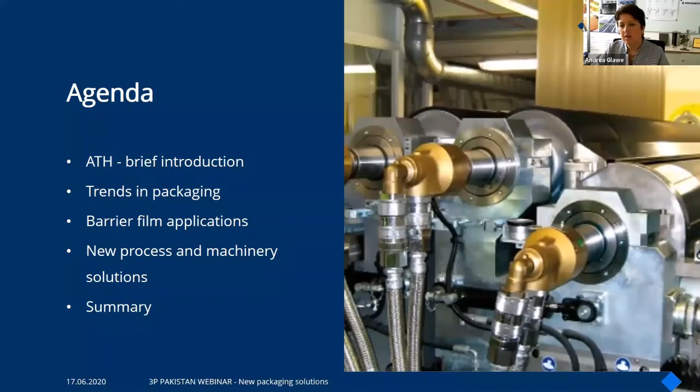The title which I chose was Newest Developments in Coating and Lamination for Specialty Films and Flexible Packaging, because this is really one trend where we as Kroenert are seeing a lot of challenges and opportunities right now. I want to give you a very brief introduction into our company. Then I will follow with all the trends which we see in packaging. I will show you some ideas for barrier film applications, some machinery design ideas, and at the end I will give you a very short summary.

So you see here our company view from the roof side. We are located in Hamburg in the city center, really in the living area, or in the most active area of Hamburg and the north of Germany. Kroenert itself, we belong to a holding group of companies. So we have Kroenert, which is the most important part because we have the highest number of employees. We were founded in 1903, and with that we are one of the oldest machinery suppliers in the world. So we have a very long tradition, very interesting to follow all these historical activities from the beginning until today, through all the critical times of Germany.

We founded our own drying company in 1995. So whenever you get a company line from Kroenert, the equipment for drying is coming from Drytec. Two years ago, we bought the company Coatema, a very efficient company for small lab equipment, for very functional equipment, and also sheet-to-sheet coating equipment. And we have our own gearbox company, which is doing parts and equipment for us.

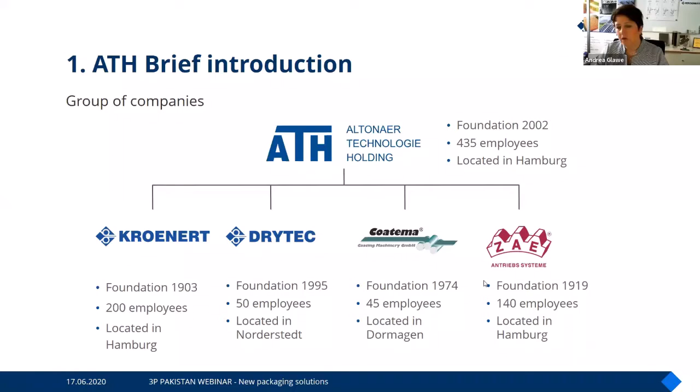So what are we doing? We are producing complete coating lines, as you see at the left-hand side. We are doing also single equipment. So if you have an existing line and you want to retrofit the machine with some more sophisticated equipment, then we can help you as well. We have all the drying equipment, which you see here at the right side, and we are also doing all the winding equipment. So overall, what Kroenert is doing in the coating business, we realize here in Hamburg.

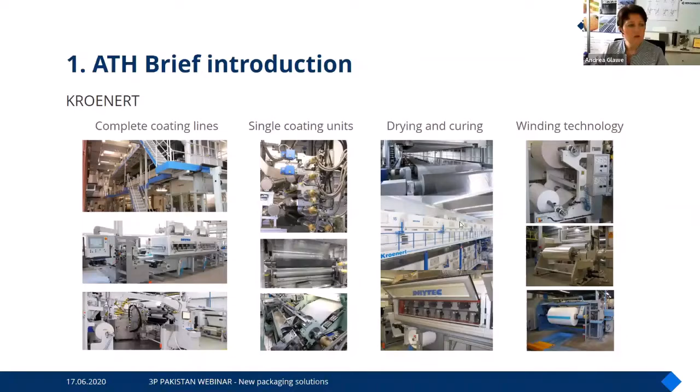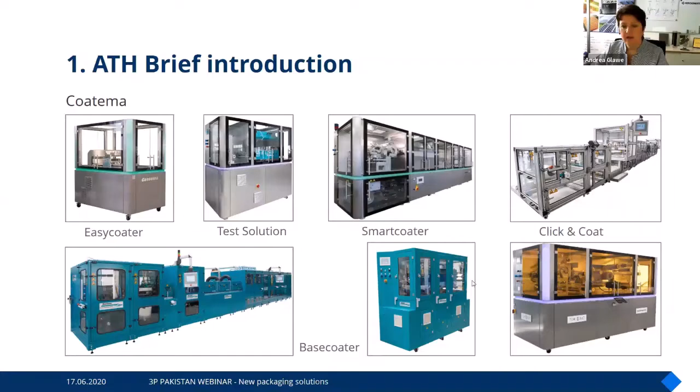Some ideas of what Coatema is doing: we have a lot of different equipment, and as you see, size and functionality can be highly adapted to the end product. So from small sheet-to-sheet coating over small lab lines, 10 millimeters up to 500 millimeters width. Whenever you go into test equipment, they are the best partner for you.

In which areas do we handle our machines? You see here at least three product areas. We are doing a lot in flexible packaging, so whenever you have a flexible packed product in your hand, it could be a product from our machines, from any kind of materials. In the middle you see technical products; even here we have high dominance in the market, from flexible films to protect materials, like glass protection film. Here you see in the left-hand picture some ideas about test equipment, but also about reflective material - very versatile.

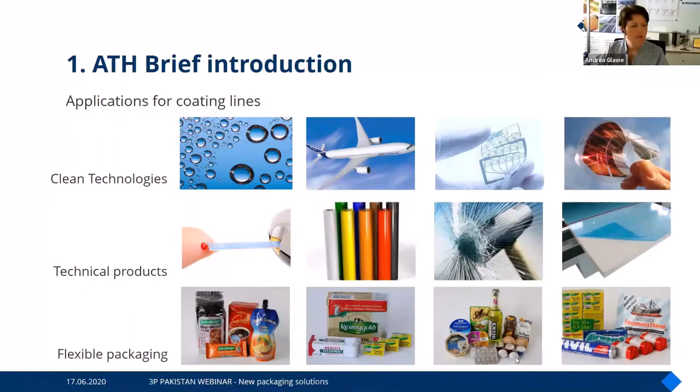And last but not least, we are doing a lot of equipment for clean technologies. We are certified supplier for the aerospace industry, so Airbus, Boeing. Whenever you are sitting in a new carbon fiber airplane, it's at least a little bit realized with our equipment. We are present in printed electronic and also in organic photovoltaic. So you see the range of products which you can do by coating and laminating is very wide, and this makes our business very interesting, honestly.

So what are the trends in packaging? I guess you all know that we have huge problems worldwide with waste material. There are always pictures of views of the ocean which is polluted with plastic. And at the other side, you see some ideas of numbers. For instance, on the left side, it's quite interesting when you see how many plastic bags are used and what is the volume of them. And then only 12 minutes such a plastic bag is in use. You can imagine it would be good to have recycling concepts to keep these bags out of the environment, out of the wasting in somewhere which is not recyclable.

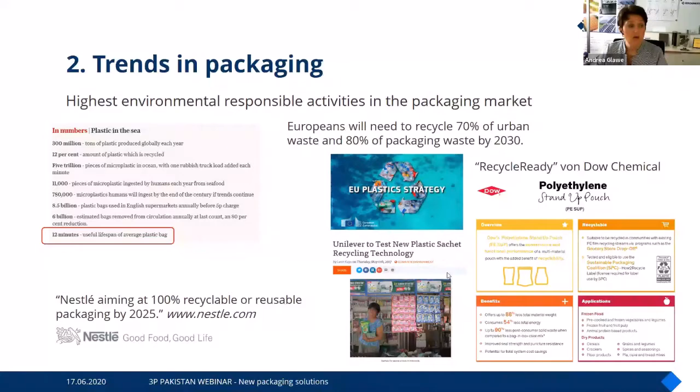And you see here also a lot of trends. So we all know that Nestlé announced until 2025 recycling of all packaging products. We have in Europe the new European Plastic Strategy Alliance, and we have also companies like Dow Chemicals, which are doing also a lot in finding solutions how to recycle packaging products. What else do we have?

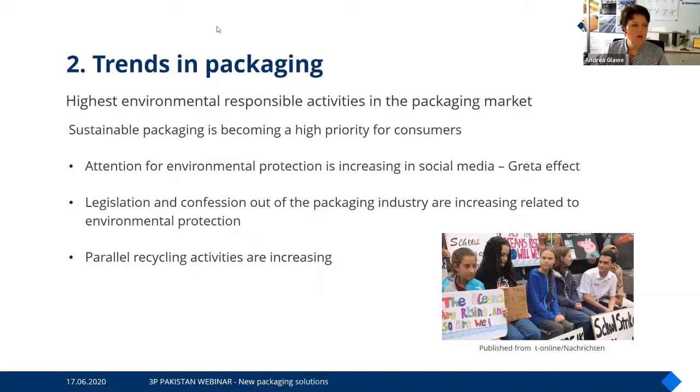I guess you all know the so-called Greta effect. So the whole young generation is now fighting for environmental protection. We have increasing awareness in social media related to recycling, to sustainability, but we have also a lot of countries which started already legislation and confession goals for the packaging industry, but also in the companies. For instance, in Germany, the target is to recycle all packed products until 2030 to nearly 100%. And due to that, you can imagine everybody needs to follow. Each company which is in the packaging business needs to supply ideas how to follow that activities.

What are trends which we see right now? One trend is in the label market, easy to peel adhesive development to improve the recyclability of products where you need to peel off a paper from a plastic container. We see a lot of new solutions also in the Internet of Things, that products can communicate with each other. You can get information from your product, but also you can get information about the material which is used in order to pack the product.

And we see a lot of smart packaging solutions which are coming more and more in supermarkets, but also for many other applications.

But at the end, we need packaging materials. If you look into India, for instance, there is the definition to avoid wasting of food, to reduce always food which is not used, and for that you need a packaging material. You need to protect the food, you need to protect the food against gases, against oxygen, water, and also against the influences which are coming from the environment, UV light for instance, but also against harmful pollution for the human body like plasticizer, printing colors, mineral oils, and so on. So without packaging, it's not possible. We need that material. And due to that, we need to find solutions.

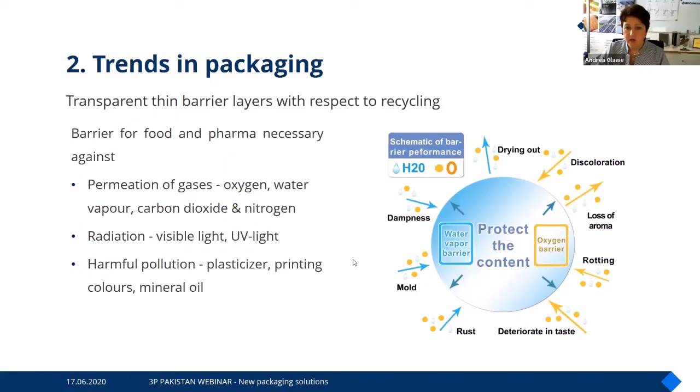How can we improve all the materials which are used for packaging in order to avoid that this material is going into the environment? So here are some first ideas. For sure, we can look into a thickness reduction of materials which are used. There's a huge trend in the simplification of laminated structures. Monopolymer structures are more and more used. So you see a lot in pouches where a PE material is laminated with a PE material by usage of barrier adhesives.

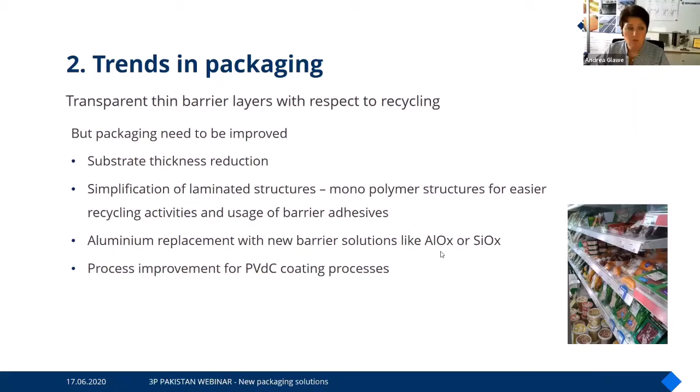We see a huge trend in aluminium replacement with new barrier solutions like aluminium oxide or silicon oxide. We see also process improvement for PVDC applications to make also machines more sustainable and to look how to improve the processes. This is also a quite interesting trend, which you see here. There are ideas to pack a medical product with a certain kind of packaging which is able to communicate with you, with the human, but also with the environment at the end.

There are already packaging materials available, which you see for instance in the left-hand picture, which communicate with you. In case you're eating your pill, your smartphone shows you smiling, and if you don't eat your pill, your smartphone reminds you to eat the pill. This is very important for medicals which are really necessary to save your life, blood sugar products, or even blood pressure reducing medicaments. All these are very important. But there are also more and more packaging materials available which can communicate with you, which can give information to you. And all this is a quite interesting trend in the packaging business.

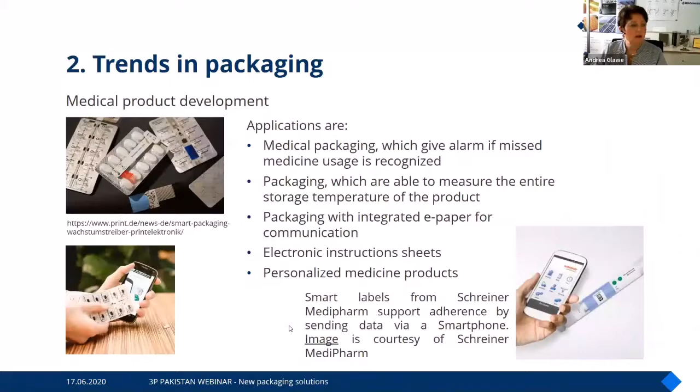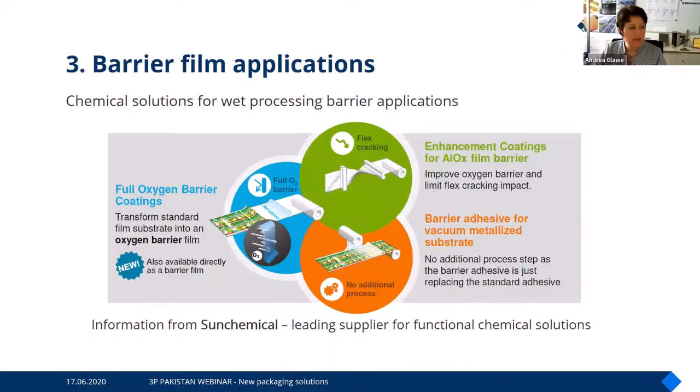So what do we see in the barrier film business? There are already chemicals available which can improve the protection of an aluminium coated material. Barrier adhesive we see more and more, and also there are already full oxygen barrier coatings available on the market. So at least products are coming from developing chemical suppliers to fulfill all the requests which are necessary.

What did we as Krönert do? We also look into how to improve processes. One project which we realized was to improve PVdC coating, which is still a very often used barrier for medical products, but also for food. Here you see some ideas which we did together with Solvay.

The idea was to improve the evaporation rate of PVdC coated material, and we started with a volume of 6 kilograms per square meter an hour, and after a certain kind of development we reached 10.2, which means we could increase the drying performance for PVdC coating nearly double in value.

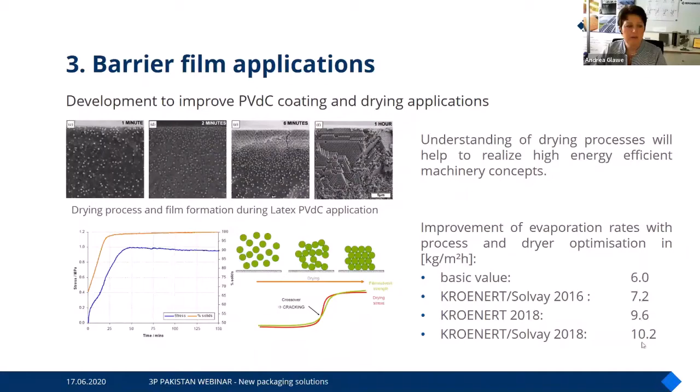In addition, we also looked at how we can improve the process itself. Whoever is familiar with PVdC coating knows that the basic value in the past for coating PVdC with one layer was 15 grams per square meter, which means if you need to coat 90 grams per square meter due to a medical pharmaceutical product, you will need to run through the machine multiple times.

To improve that, we did a lot of development with Solvay. And today we reached already 45 grams per square meter, which means with the optimization of the process, with a much better drying performance, with a much better understanding of the process, we really were able to triple the coating weight with one layer, and this results in much better handling in a coating machine.

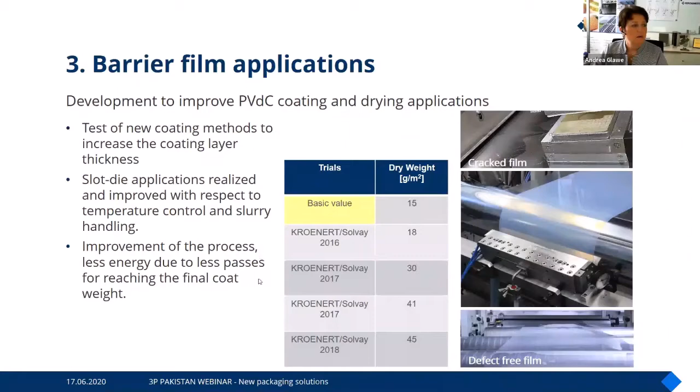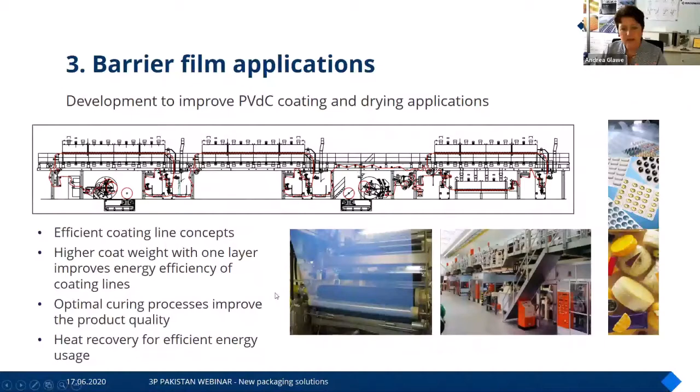Summarizing this development, you see that we can realize a more efficient coating line, with a much better coating weight with one layer, and due to that, we can realize much more energy efficient machines. We can optimize the curing process and also the heat recovery for efficient energy usage. All this is possible as soon as you go much deeper in the understanding of a process. It's not just supplying a sheet of metal. We really want to support our partners, our customers, in understanding what the machine is doing.

Huge trend, I already mentioned that, aluminium oxide. Aluminium oxide for sure is not realized with our machines. Here are companies like Bühler or Applied Materials or others which are doing that aluminium oxide layer in a vacuum way. But the next step is necessary to protect that sensitive ceramic layer with an additional coating. It's also necessary to apply an additional barrier in order to get much better performance. And also for digital printing processes, it's necessary to protect that ceramic layer in addition.

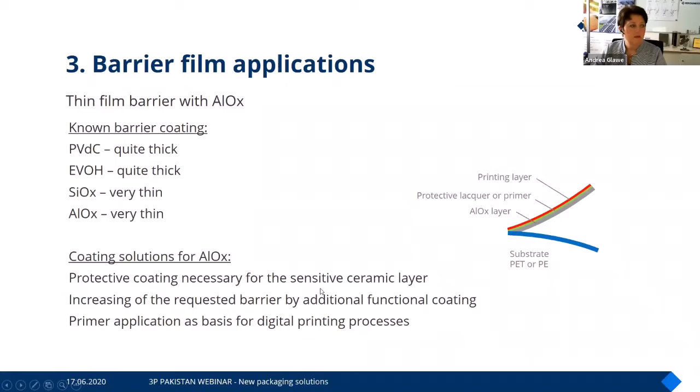Here you have some ideas of what is already possible on the market. You see, for instance, OPP has a very high rate for letting moisture and oxygen in. And with only Alox coating, you can already reduce the volume to only 50 cubic centimeters per square meter a day. And with an additional wet coated barrier, which is for instance supplied from Dow Chemical, you can go to a much deeper value. So the combination between aluminium oxide and an additional coating, this is what we are looking at when we speak about aluminium oxide business.

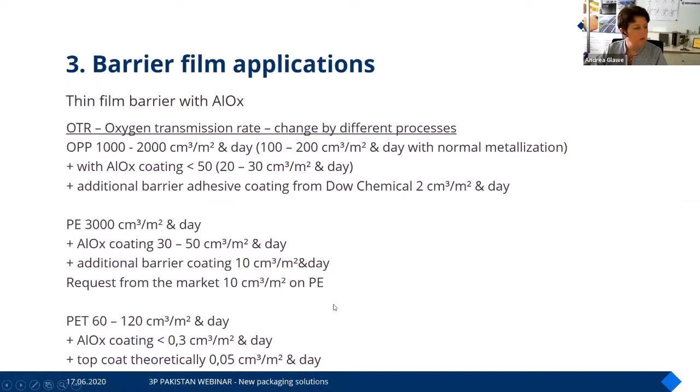So what are now machinery solutions to do such processes? At least we as Kroenert, we are looking into inline coating processes, which means installing the coating process directly in the stretching line, and we are also in offline coating processes.

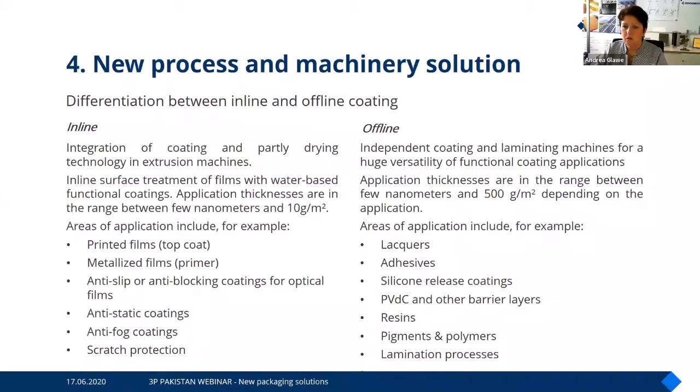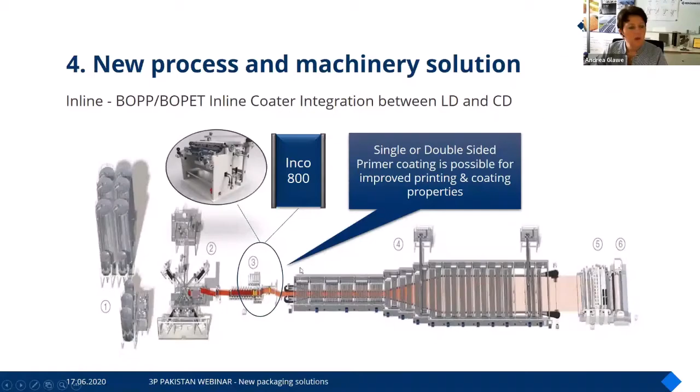And depending on the solutions, different ideas for products are realistic. So whenever we go to inline coating, we are in between the LD and CD process in an extrusion line. So you can see here the position of the inline coating, which is realized from our side. Here we are working very close together with Brückner, but also with many other companies.

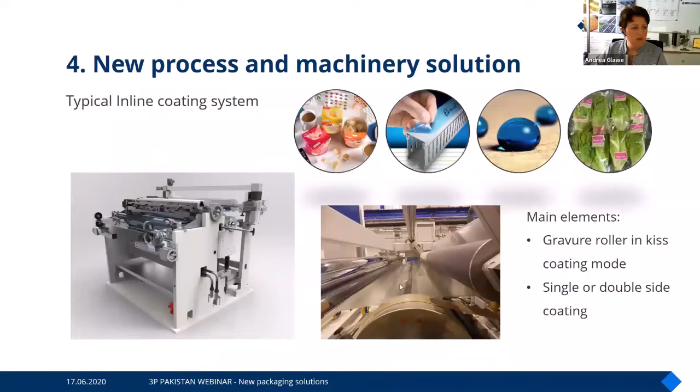Inline coating means you can adapt already a certain kind of functionality to the material. The main elements are gravure roller in kiss coating mode, as you see here, and you can get that in single or double side coating application.

When we go into offline, for sure, we need to handle the complete process. So we need an unwinder, which is on this position behind that enclosure. We have the coating system, depending on the process. It can be a roller, slot die, comma bars, knife coating, whatever.

You see here on top the dryer, which is necessary to cure, to dry, to cross-link the coating layer. At the end, usually you need to cool down to go to a temperature which is reasonable before you rewind the finished product. This is at least the standard solution for a coating line.

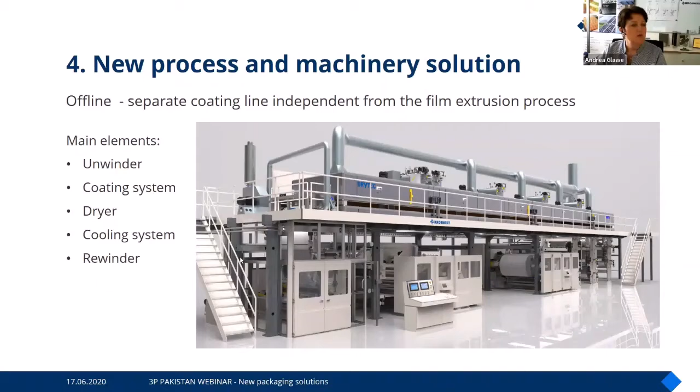When we go into Alox, thin film barrier applications, we need to realize with such a coating line the conservation of the barrier layer, the mechanical stabilization of the barrier layer. We need to improve the printability, and we need to allow also with an additional layer the sealing capability of this highly sophisticated barrier. So this is what is realized with a wet coating process.

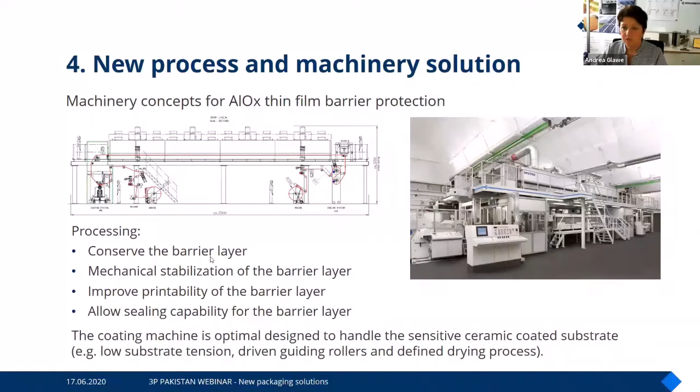What is necessary in such an aluminium oxide coating line? The material Alox is the ceramic layer, and I guess you can imagine ceramic is very sensitive. So we need to look into a very sensitive handling of the material. It's necessary to have a very perfect coating layer, invisible usually, and very smooth to realize, for instance, inkjet printing processes.

We need to go with a low bending angle around rollers to avoid that the Alox layers start to crack or start to get certain kind of problems. We really look to avoid contact to guiding rollers, and as soon as the guiding roller is coming in contact with the Alox, which you can't avoid, this roller should be driven.

It's also very important to have a very perfect alignment of the material in the machine to avoid stress of the ceramic layer. We are looking into a very proper tension control in the machine, and this is very important to really keep the very good functionality of the Alox layer in a proper way.

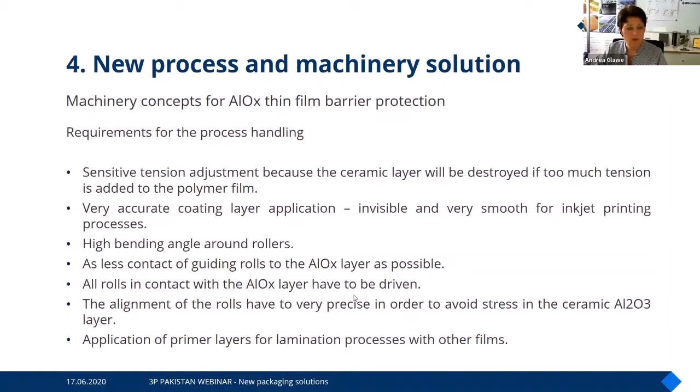So coating processes, usually we are looking into gravure methods. This can be realized in a direct contact or in a kiss coating mode. Usually engraved coated rollers are used with a ceramic blade to define the coating layer.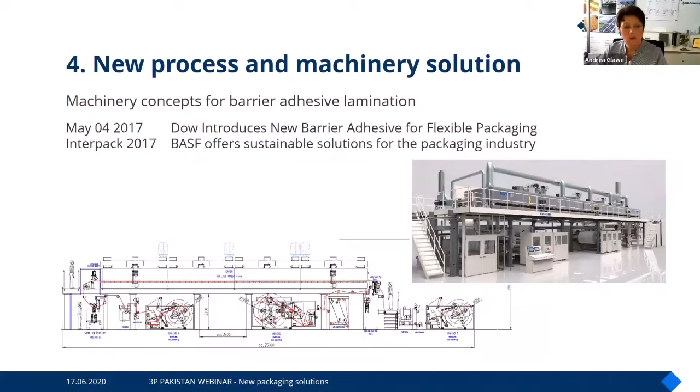And for that, you need at least a machine which is able to apply the adhesive film, which you see here with an engraved roller system. We have the drying equipment, and at the end, the second film is laminated on top of this sticky surface. And then you have very perfect laminated pure polyethylene material available.

I mentioned already that it's also an interesting trend, NFC labels which are able to transfer information about the product itself, about the handling of the product, about certain kinds of storage processes for a product. Quite interesting, for instance, for medical products, where you need to avoid that the temperature is getting too high in order to avoid that the product is destroyed.

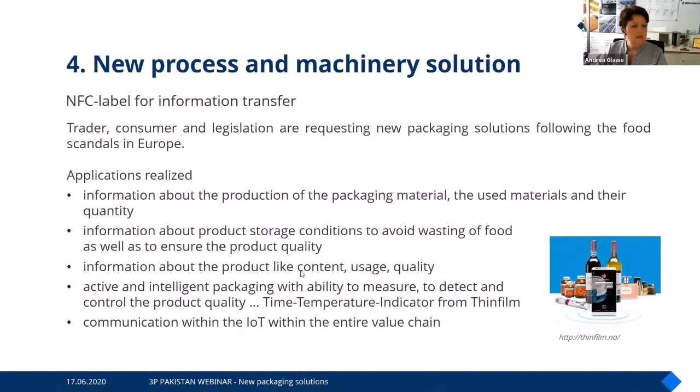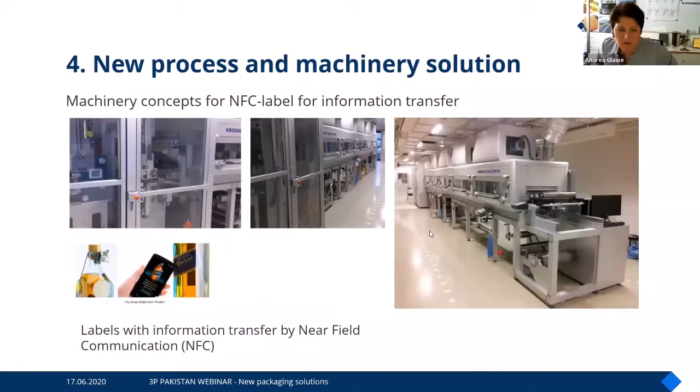Here you see a very typical machine for printing of such NFC labels. This machine was supplied to Thinfilm and is now handled by the company Ynvisible, a very, very innovative company for such materials. As soon as you go to printing, for sure, you need a different kind of process to realize that.

We are present in the gravure printing process. Here at the right-hand side, you see the image of the gravure roller, and you see the result which is coming out of the printing process with that gravure roller. So with that, you can, for instance, print circuits, you can print an RFID antenna and all these functional materials.

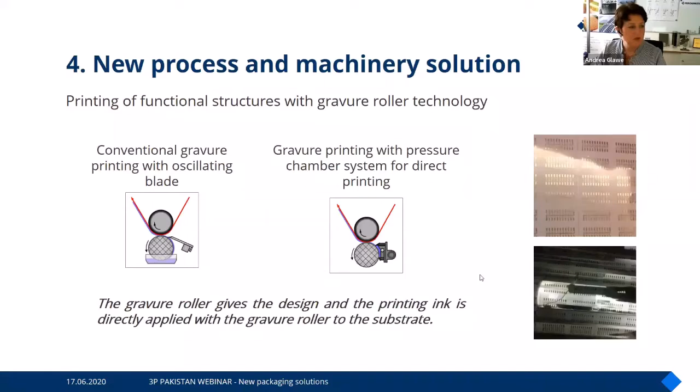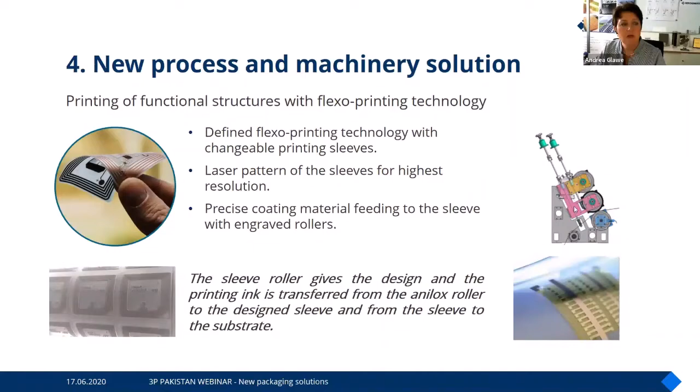We are also looking into flexo printing processes. In this case, you have an anilox roller with a very fine structure. You have in the middle the flexo printing sleeve, which you see here, for instance, with the design of an RFID antenna. And above, you see the product which is coming out of such a process. Also, this is a suitable solution. The advantage of flexo printing is that the change of the sleeve is very easy to realize in a very short time frame.

We are also looking into screen printing solutions. So whenever the thickness of the printing layer needs to go in a wider range, in that case, we need the screen printing process, but the accuracy and the alignment of the product and the right pattern of the product, all this for sure is also possible with such a screen printing solution.

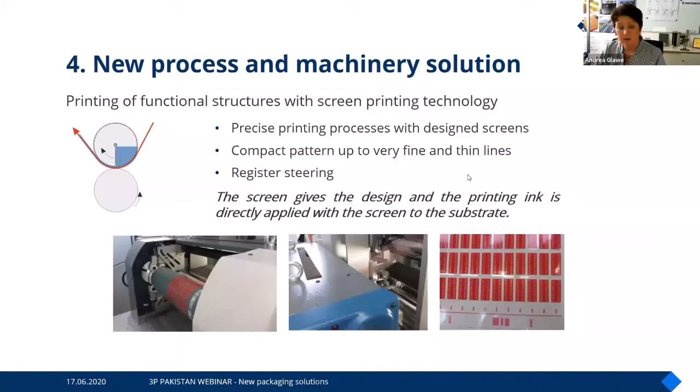So I'm now nearly at the end of my presentation. I want to give you a very short summary. Whenever you want to see such processes and you want to get a first impression how such a process can be realized, you can come to us. We have one center for coating at Coatema in Dormagen, near Cologne. And we have here in Hamburg at Kroenert a machine running with 1,600 meters per minute, the fastest test line in the world, which we can offer you for tests and where you can come and see how your product can be realized.

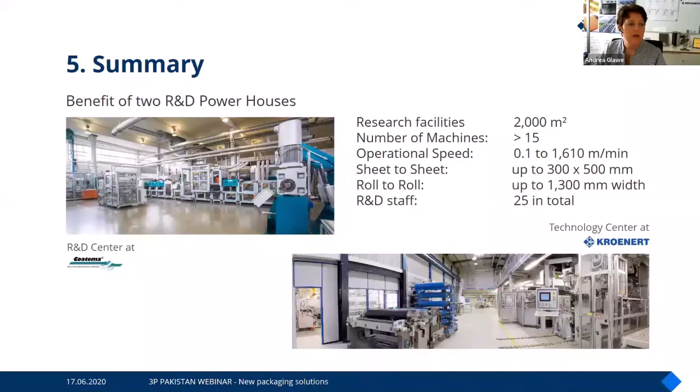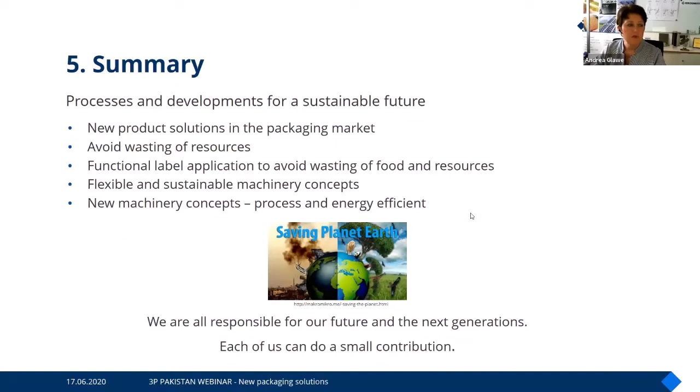So summarizing new product solutions in the packaging market, we try to supply solutions to avoid wasting of resources, functional label applications to avoid wasting of food and resources, flexible and sustainable machinery concepts, and we are looking really how to make our machines process and energy efficient in order to give you the perfect equipment. So I'm at the end, and I hope I was able to show you some ideas and trends, what is going on in the market.